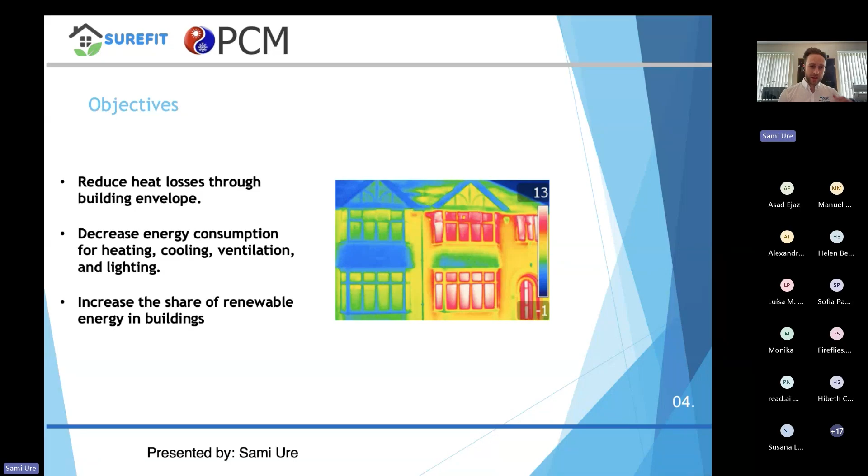Re-emphasizing those heat loss objectives, here's a simple thermal image shot showing on the right a house with very poor insulation, and on the left a house with very good insulation. You can clearly see in red the amount of heat escaping through the building envelope and glass panes. By simply retrofitting better insulation into a house, you can trap a lot more heat inside, meaning you use less energy. This feeds back into the project's goal of decreasing energy consumption for heating, cooling, ventilation, and lighting, and hopefully increasing the share of renewable energy used in buildings.

The key stakeholders for these technologies, the people who will be benefiting, break down fairly simply. Primarily, we're looking at building owners and users—businesses and people who own different premises, whether residential, commercial, or industrial. We'll also be targeting manufacturers, people already in the industry our technologies lean into, because we're trying to break the norm of how business or building design is usually done. We need to work with them to push these new ideas forward.

Product and service developers generally means the people who will actually be selling and installing these technologies. This has been a big focus throughout the project—it's no good having a technology or product if nobody can physically install or work with it. So that's one of the key areas we're working on and hoping to build relationships in, to allow for easy retrofit, one of the main goals of these technologies, within the existing housing stock across Europe and the wider world.

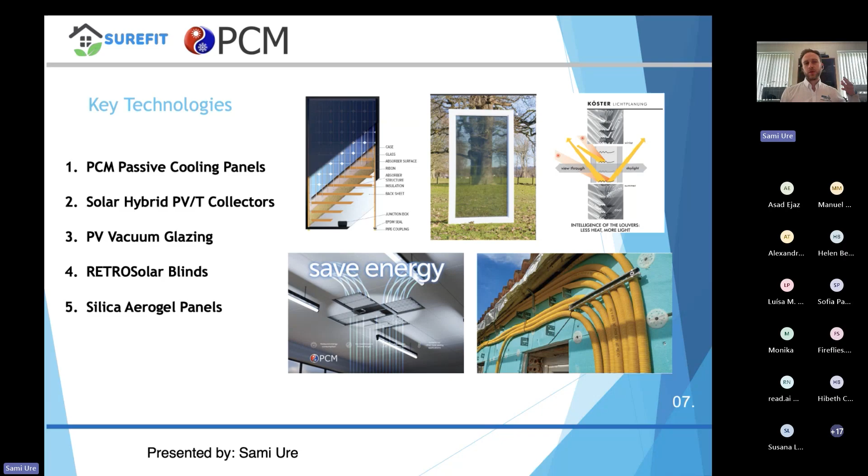Now I'll quickly summarize the technologies that encompass the Surefit project. In simple terms, we've got 5 key technologies listed on the left, with visual representations on the right. Leading off is PCM passive cooling panels, our main input into the project and the main technology and know-how we bring. I'll also talk about solar hybrid PV thermal collectors, PV vacuum glazing—an incredible concept and technology—retro solar blinds, and silica aerogel panels. I'll briefly cover technologies 2 through 5 and give a more thorough explanation of our own, as it's the one I'm most familiar and comfortable with.

PCM passive cooling is a concept whereby you can cool a space, building, or room without the need for mechanical or electrical heating or cooling elements. Essentially, we can take away the need for mechanical cooling—conventional heating, ventilation, and air conditioning equipment—and do it by using nature.

My hope over the next few slides is to explain how exactly that magic is possible.

Very quickly, who we are as a company. We are Phase Change Material Products Ltd, a UK-based chemical research and manufacturing company specialized in phase change materials. Over the last 20 years we've been involved in multiple forms of research and development, both internally and externally, and we consider ourselves global leaders in PCM technologies and know-how.

So very quickly, what are phase change materials? It's a good question, one we always have fun explaining. The best way is to simplify it to its pure essence. Basically, all PCMs are different chemical solutions, but what those solutions are capable of doing is storing and releasing thermal energy during the process of melting and freezing. During this process, phase change materials are able to store and release large amounts of energy in the form of heating or cooling.

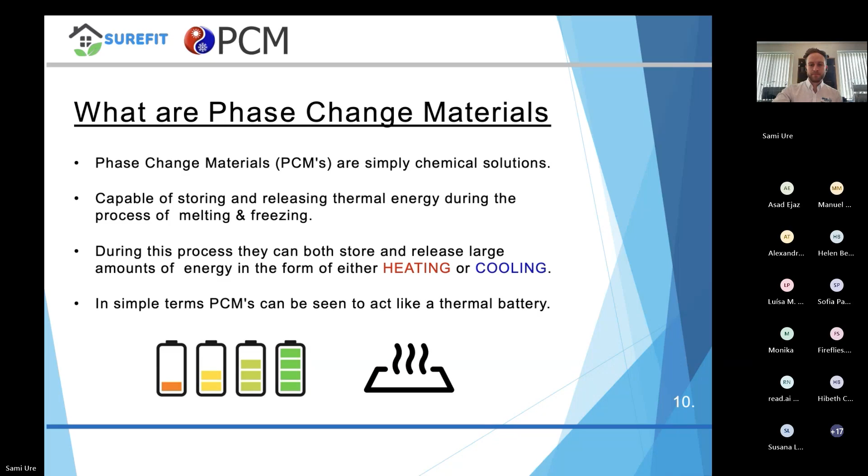The Surefit technology offering for PCMs is for passive cooling. The idea behind passive cooling is that we can store cooler nighttime energy. In most areas of the world, nighttime temperatures are lower than daytime ones. With PCM acting as our thermal battery, we encapsulate it in a plastic housing and put that into the ceiling panels of buildings. Overnight, when the cooler ambient temperatures come, nature essentially freezes those PCM ice panels and stores that colder temperature in the thermal battery in the ceiling.

Then during the day, as heat is produced and ambient temperatures rise, those charged PCM panels in the ceiling act like a thermal sponge, absorbing the heat from within the room, meaning the heat doesn't come back into the space. So the PCM panels act like a thermal sponge, keeping the room cool. That is the very simple concept of how passive cooling and PCM work.

It acts in a similar manner to putting an ice cube tray in the freezer, then taking the ice cubes out and putting them in a glass of water or a drink, keeping that drink cold for a set period until the ice melts. It's the exact same principle here, except instead of putting ice cubes into a glass of water, we're putting ice cubes into a building to help it stay cooler.

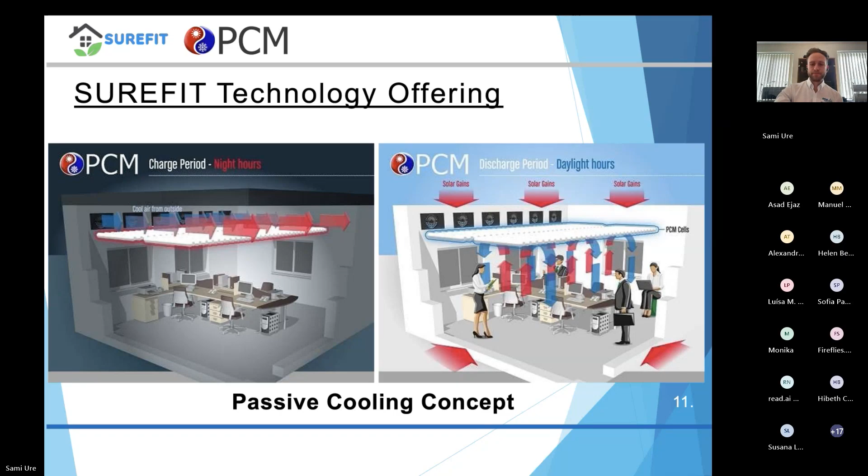As part of that, we have a plastic encapsulation, which I have one in front of me to show you. We call this ThinICE—essentially a plastic HDPE container. We fill this with a PCM chemical solution, and for the purposes of this project, aiming for 27 degrees Celsius, we select a product called hydrated salt.

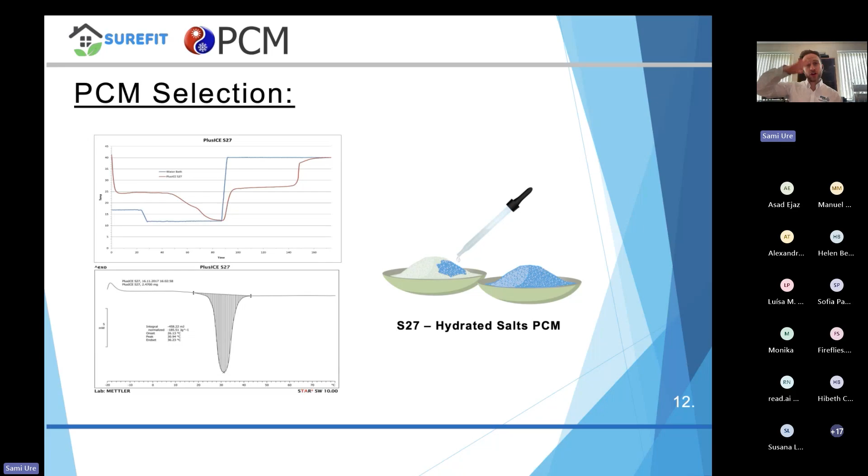A hydrated salt PCM starts off as an anhydrous salt, one with no water mixed into it. We add water to hydrate the salt, then use a mixture of salt and other chemical solutions together to create a final product that we pour into these plastic encapsulations, which we put into the ceiling. This freezes and melts at around 27 degrees Celsius, giving us the correct temperature to allow passive cooling of the room to take place.

This is the encapsulation method - it's the ThinICE container I just showed you. Essentially, this is it in graphical form, but this is what we put those hydrated salt solutions into, because otherwise, if we were just to put them into the ceiling, the occupants would get very wet. It needs to be encapsulated in some kind of container.

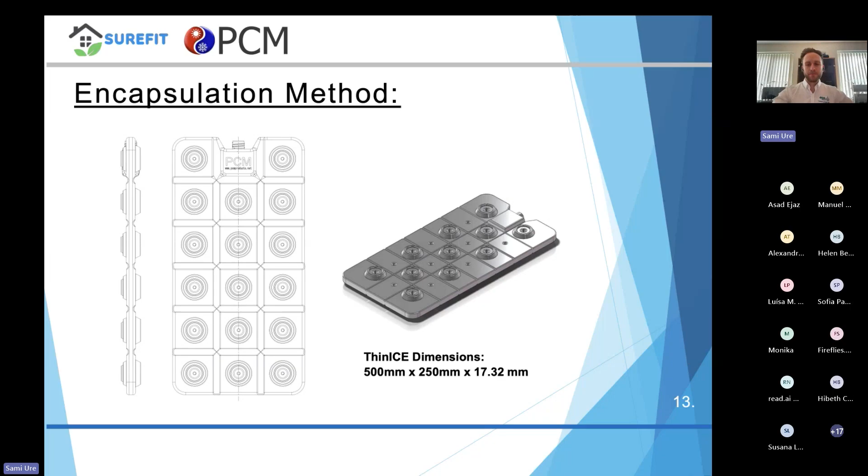So within the Surefit project, the idea was to take three identical buildings. There are multiple sites across Europe. The one I'm going to focus on is the location in Spain, in the city of Valladolid, which is about an hour and a half west of Madrid, or northwest of Madrid. And essentially here we were able and fortunate enough to have access to three identical buildings.

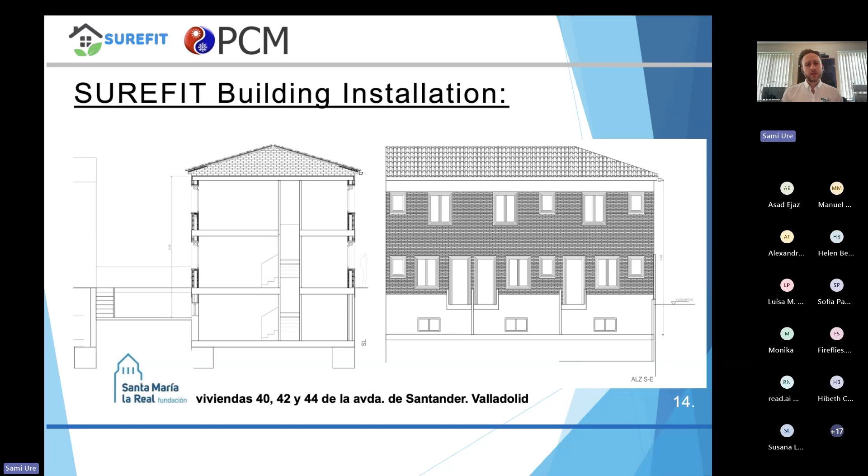So what we came up with the idea to do within the project is to install PCM panels and passive cooling into two of the apartments and leave one of the apartments without any PCM. That would give us a control room or control setting in order to compare and contrast with the rooms that have PCM in them. This shows an overall layout of those apartments, and you can see there that they are practically identical units, giving a very fair comparison in performance over time.

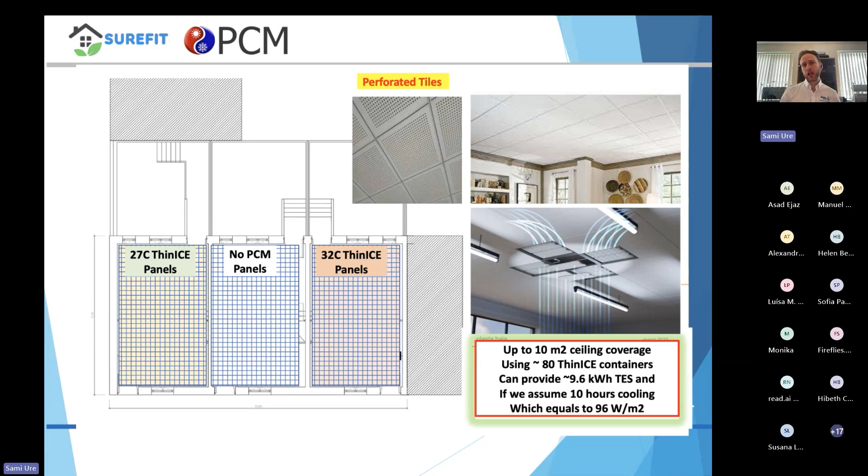The reason we did that was so that we could get a good comparison and see how the performance of the room and how the ambient temperature within the room changes based on a 5 degrees Celsius difference in PCM storage temperature. This will be very interesting over the next few months. These have been installed in Valladolid, Spain, and it will be very interesting to see, as we're getting into the hotter summer months, how these PCM panels perform in reality and not just in modeling and within our labs.

Just a quick slide here to really show you that now that we have thermal batteries, essentially, with these PCM materials, we can apply them to all sorts of industries, as you can imagine. So not only can we do passive cooling, we can also implement it into heating. If we change the temperature of that solution inside of the ThinICE, we can also bury it into the floor and then run underfloor heating through those same panels and basically improve the performance of the heating system. By doing this, we just want to really promote all these different ways that once we have thermal energy storage systems, how best can we apply those into a building setting in order to improve the overall efficiency of the building, which is the primary focus of the Surefit project.

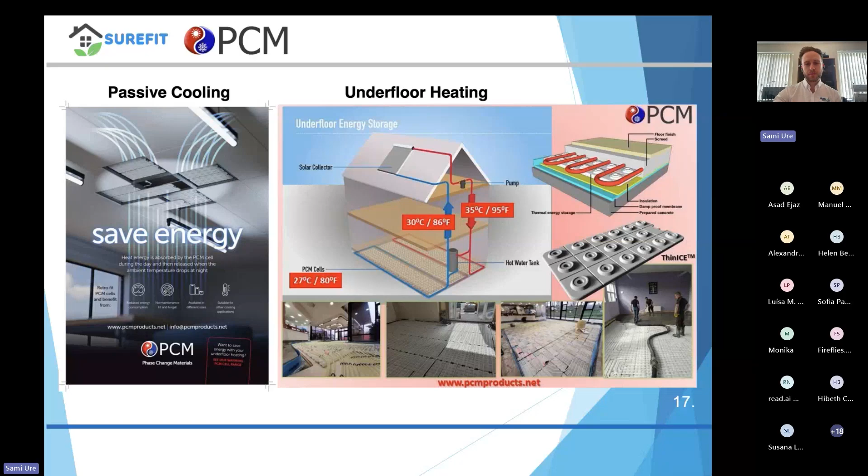So now that I've given you the breakdown over PCM and how passive cooling works, now I'm just going to give you a very quick and brief summary of the other technologies that are involved within the Surefit project, and I hope that I can do them justice.

So the first technology here is a very interesting one, and one that I believe is a fantastic idea. You may be familiar with solar collectors, solar panels - we see them all across Europe now. Generally speaking, most of the solar panels that you see on rooftops today are what we call PV panels, and all that means is photovoltaic, which essentially means that those panels generate electricity, and that's all they do.

The idea behind these solar hybrid PV thermal collectors is that not only do they provide electricity, as do conventional photovoltaic cells, these also have the ability to generate thermal energy, which is a big deal because with the sun, you obviously don't just get electrical output, you can also get a lot of heat from the sun as well. These panels have a huge benefit of being able to combine thermal and photovoltaic technology to give you both electricity and thermal energy so that you can run hot water systems.

This maximizes the energy generation and efficiency by allowing one panel to do two things. You are heavily optimizing how efficient your solar can be. It also allows for the reduction of overall building energy consumption.

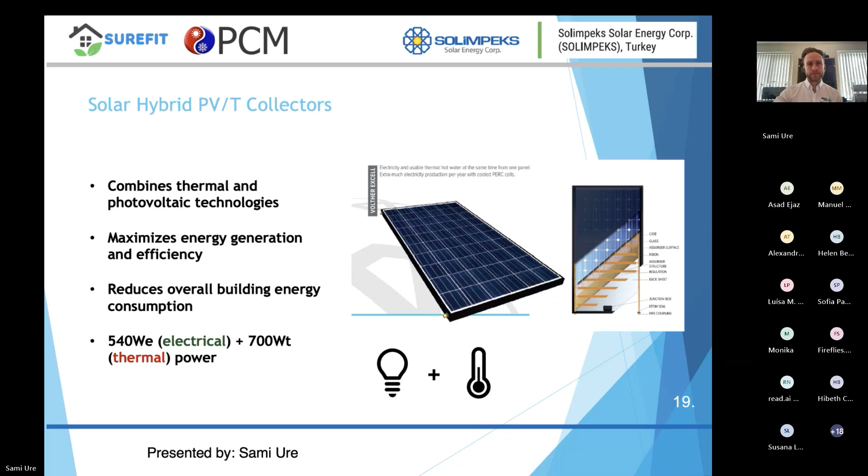The next technology comes from the University of Nottingham, and is another really exciting technology that I have a lot of passion for - PV vacuum glazing, which is really quite amazing. You have to see it in person to believe it, honestly.

Essentially what this technology is doing is combining PV technology, like we've just spoken about, but putting that within a regular vacuum glazing panel. So this essentially means we can make a window for a building but put solar panels within that window, which seems like a no-brainer, really. If you're already going to have windows on a building letting natural light in, why not try to capture some of that natural light or UV from the sun and generate electricity?

It sounds like a great idea. When you explain it to anybody, they generally say, 'Well, that's a great idea.' You can see an image here of a panel capable of producing roughly 52 to 86 watts per meter squared of electrical power generation. These can be implemented into any conventional double glazing or PV glazing window system. The University of Nottingham have developed and been creating these panels now for several years.

The hope through the Surefit project is that we can build relationships with commercial partners, primarily PV vacuum glazing manufacturers, with the hope of promoting this idea and sharing real world performance data like the sites and buildings in Valladolid, Spain, and across Europe, so that we can present the case that these should be more of a standard. Because at the minute, the common building practice is not to consider these technologies - it's to stick with what's comfortable, what is known, and what is established.

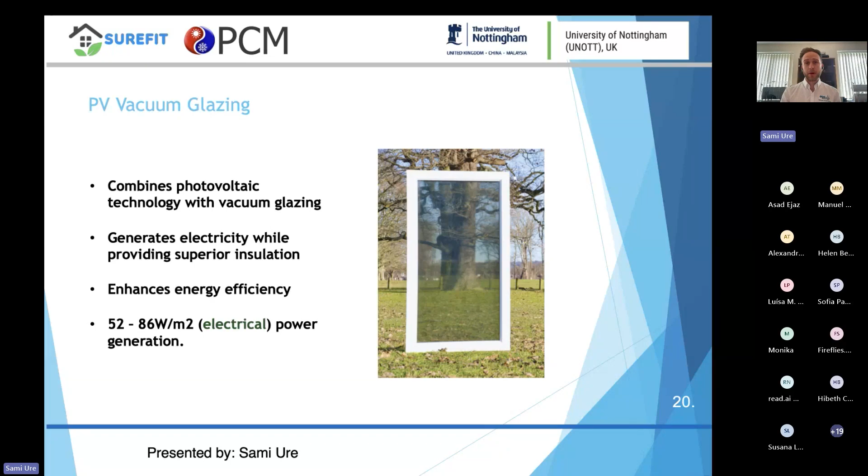The next technology is a very fascinating one. It's interesting how this works. It's not an area of my expertise, but I find it almost like magic. These retro solar blinds are from a company called Köster, from Germany.

Essentially what these blinds do, and hopefully you can see it clearly on the image on the right, is they're very specially designed blinds with unique grooves in them, called special mirror optics, on the louver surface or blind surface itself.

What they're able to do is reflect heat, taking it away from the building and away from the window, while allowing more of the actual light to pass through the blind. This enhances personal comfort.

Most importantly, very similar to how the passive cooling and PCM solution works, it aims to reduce mechanical cooling. That's a key focus. If we can reduce the amount of mechanical cooling, generally air conditioning, that we need, we can improve the overall building envelope performance efficiency and energy wastage.

So this technology is pretty incredible. Based on the data they've already released, it looks capable of reducing the temperature within the room roughly anywhere from 1 to 2 degrees Celsius, simply by installing this very clever blind design.

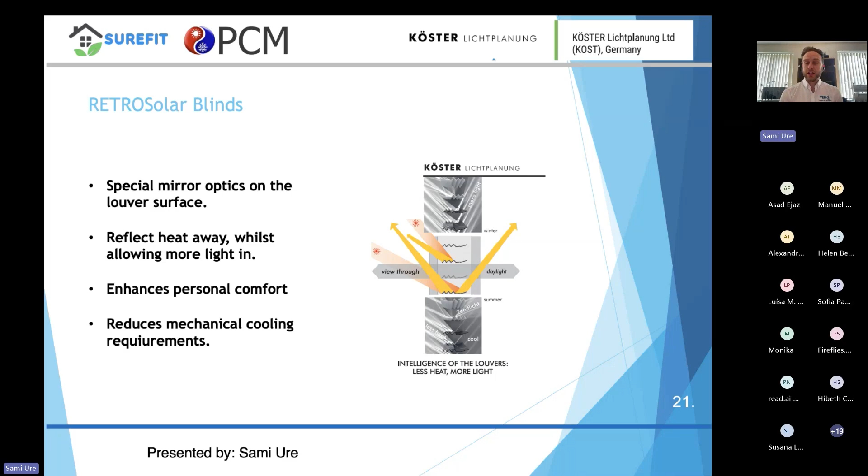Anything that allows for the reduction of mechanical cooling is a good thing, and if it could be as simple as installing a new type of blind, that's a fantastic idea. I'm excited to see the performance over the next few months in Spain and across Europe, but also at the end of the project, to see how current manufacturers of blinds react to seeing this data and concept.

The next technology is a big one - silica aerogel panels, which are a very lightweight, high insulation material. They're very effective at reducing heat loss as well as keeping heat outside of the building envelope. They're environmentally friendly and sustainable, and they're prefabricated, allowing for modular installation, which is a key point of the Surefit project and what we're aiming for here.

We're aiming for technologies that are easy to install. It's no good making something very expensive and complicated to install. The idea of these panels is that they can be prefabricated and cut into standard sizes off-site in a factory, then shipped to site and essentially installed almost like Lego blocks. The easier, the better.

Technologies like silica aerogel panels, which offer a cost-effective, lightweight, and easy installation technique, represent a significant benefit for the market and for consumers or building owners. When they look at how they can improve their own building performance, this is one of the technologies they can look at as a very simple, quick, and easy one to implement.

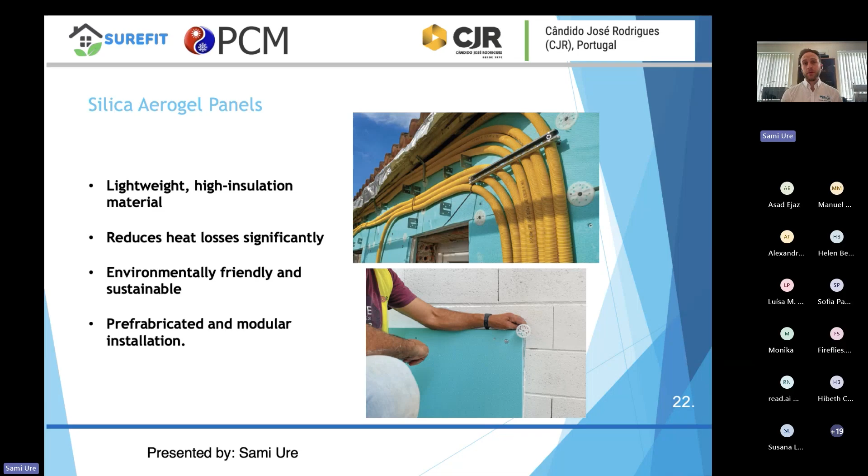Now I just wanted to quickly mention, we recently visited Valladolid in Spain a few weeks ago, where we were lucky enough to meet with the building owner of the 3 buildings I showed you earlier. On those 3 buildings, they've installed all of the technologies I've just spoken about, so this is where we will be one of the key sites.

We have a couple of others across Europe as well, but this will be one of the key sites where we are able to gather information and data so that we can see how these different technologies perform in the real world. Because it's one thing to do all of the laboratory testing and R&D testing and model how we think technologies will perform.

But until you actually install them and put them into the real world and run them, you'll never see the true performance of these systems. So this is just a very quick video put together by our partners to show the recent trip we went on to Spain, to showcase how these technologies have been installed into the building. If you don't mind, I will just play this for you guys.

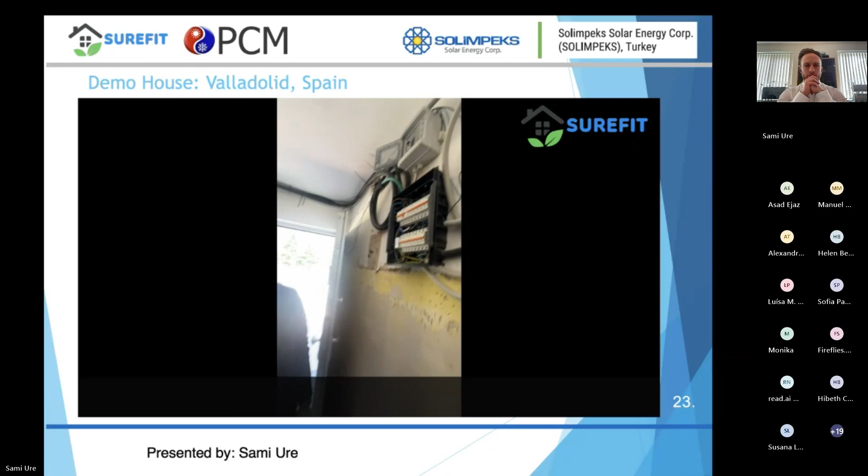Perfect. And actually, I've noticed for my own benefit and for your benefit, there is one technology actually that I

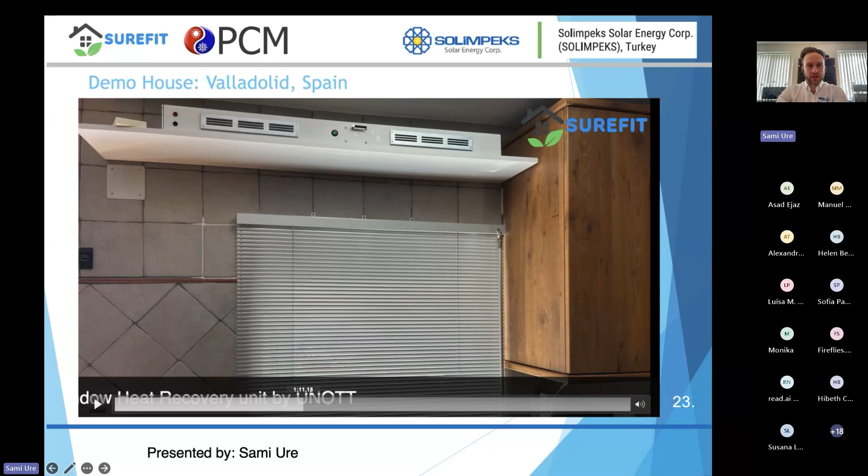I've noticed there's one technology I didn't include in my slide specifically, and it's this unit right here. This is a heat recovery unit, also developed alongside the PV vacuum glazing panels by the University of Nottingham. Essentially, this unit is a very low energy usage device that can bring fresh air into the space or room and extract heat from within the space, and it can do this in a very efficient manner.

In the house in Spain, the team there have been able to utilize the power from the PV vacuum glazing window to feed into this heat recovery unit. So the power and solar energy you're able to get from the sun for free through the photovoltaics in the vacuum glazing panels allows this unit to run essentially off grid, meaning there's no need for additional electrical input or mechanical cooling. It can allow the building to run even more efficiently utilizing free energy, which is always a good thing.

At PCM Products here in the UK, we are very passionate about the idea that anything we are given for free in nature, whether it be sun or wind for energy production, or simply nighttime cooler temperatures, if we can utilize those within the building envelope, for any application but especially within the context of this project, to make the buildings we already have more efficient and utilize what nature gives us for free, that is always the best design philosophy. It's something we're very passionate about in order to push forward greener ideas and hopefully help take the planet away from the verge of going too far into climate change and having irreversible changes to our planet.

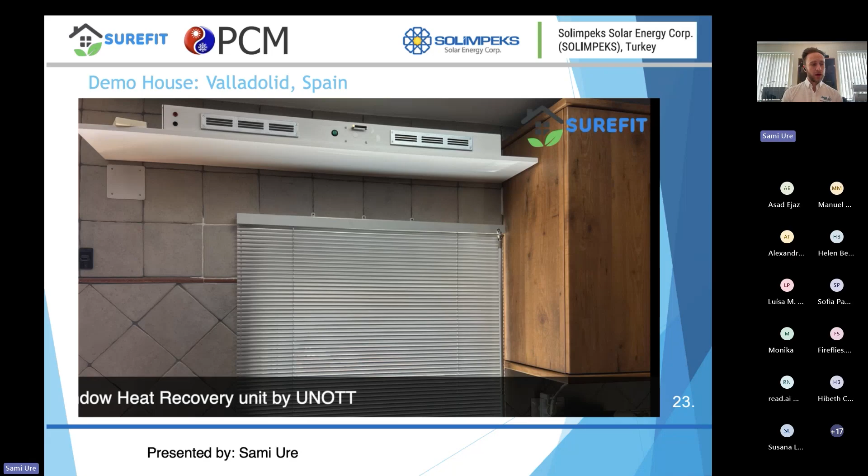I'm not going to watch that a second time. I'm a little short on time, I think, of how far we were meant to go, but that opens us up, hopefully, to a bit more time for questions and answers.